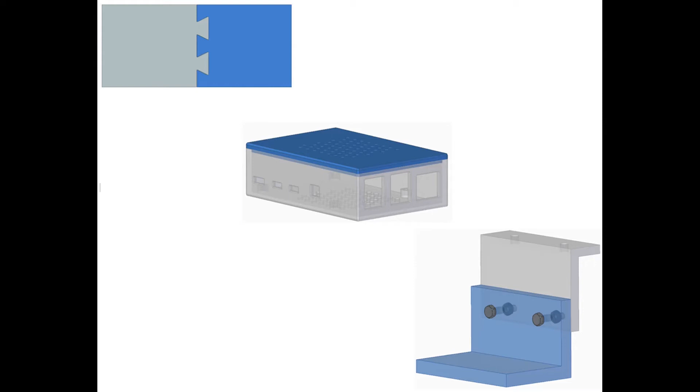In this video, I'll be going over a few examples of how to design parts in Solid Edge that will make it easier to assemble when 3D printing them. This will include a dovetail joint, using Solid Edge's lip function to create covers and lids, and using hexagon cutouts for easy assembly using nuts and bolts.

Here I'm going to show you how to quickly make a lid for this electronics enclosure. I'm going to add a body and name it lid. Then I'm going to create an extrusion using a parallel plane, placing it 2.5 millimeters below that face I selected. That's going to be the part that's inside the enclosure, holding it closed.

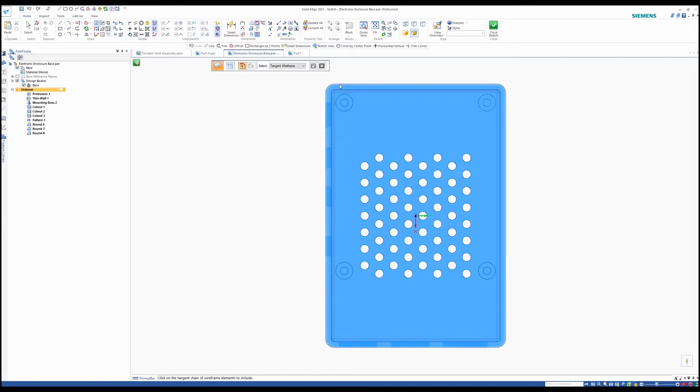Here I'm going to use the project to sketch command and select the inner profile of the base. I'm going to extrude that up by 5.5 millimeters. So you see I have this extra space around the edge there.

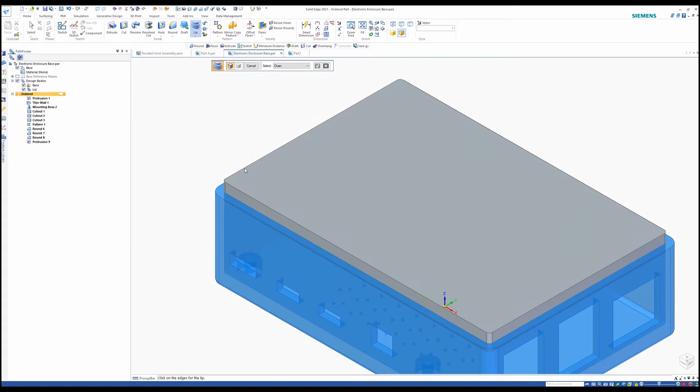So to fill that in, I'm just going to create a lip. You use the lip command, select the edge, and that's the profile I'm going to add around. Width of 3 millimeters, height of 2, and click to finish. And there you go, it's as easy as that. I've now created a lid for my electronics enclosure.

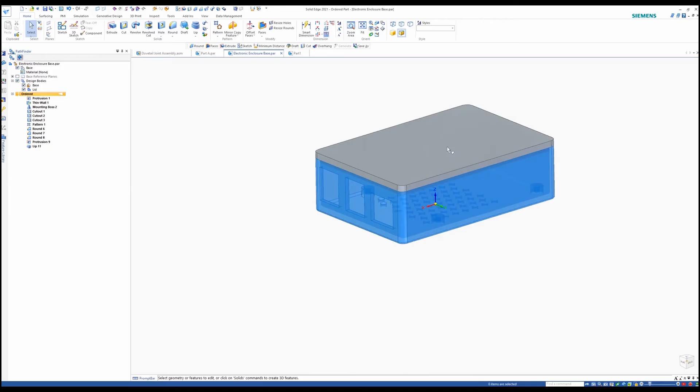In this example, we have a case here, sort of like an enclosure, and we want to create a cover for this that's going to create a full seal and stay closed. So we want to cover something like this, and a quick and easy way to do this when 3D printing is to add a lip.

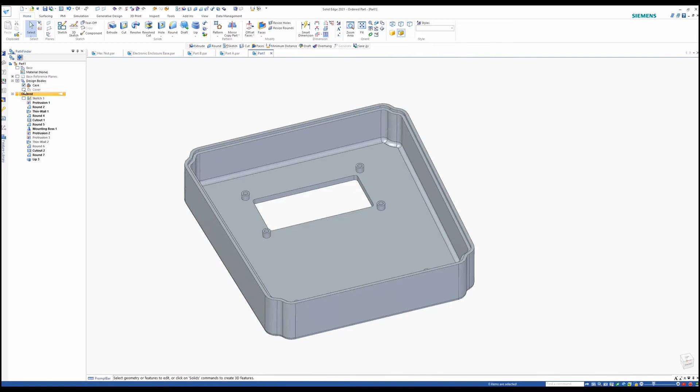In this example, we're going to add a lip along this edge where we're going to add material. I'm going to put the profile above the body, so it's going to add material there. Then we're going to basically do the same thing on the cover, but the opposite - now we're going to remove material. So I'm going to make it my active body, select the edge, and this time the profile is going to be into the body, meaning it's going to remove material.

So now you can see I have a nice snug fit there. It's going to be a press fit. You can put some glue along the inside edge of the lip, and that'll create a nice seal.

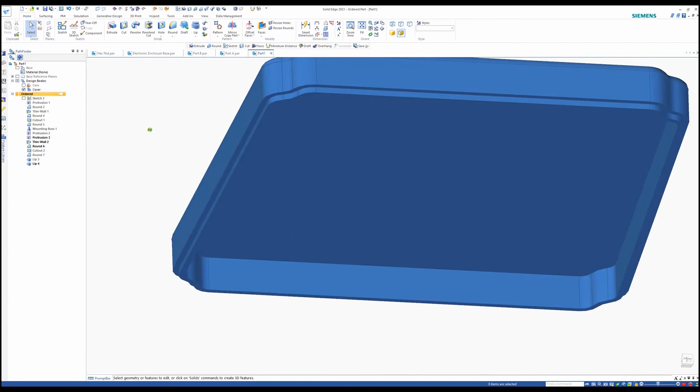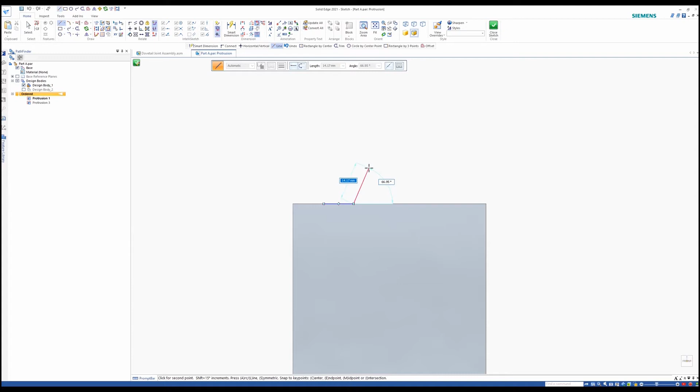Here I'll be showing you guys how to assemble these two parts if we were to 3D print them using a dovetail joint. Starting off with the first part here, I'm going to create the protrusion, and I'm going to be following HP Printer's general guidelines when creating these.

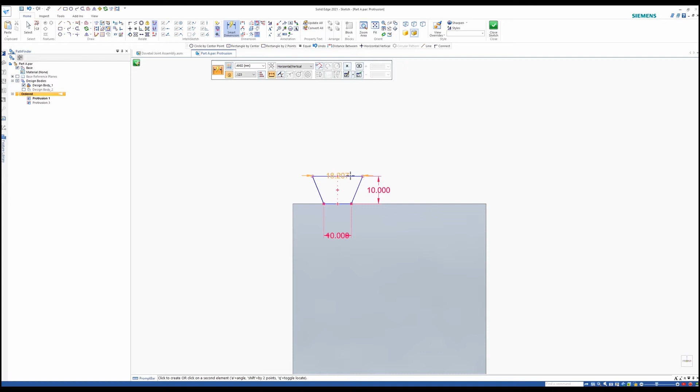It doesn't have to be exact, but they give you some general guidelines just to ensure a nice snug fit. So that's the general shape that we're going to use. I'm going to extrude it to the end of the plate there.

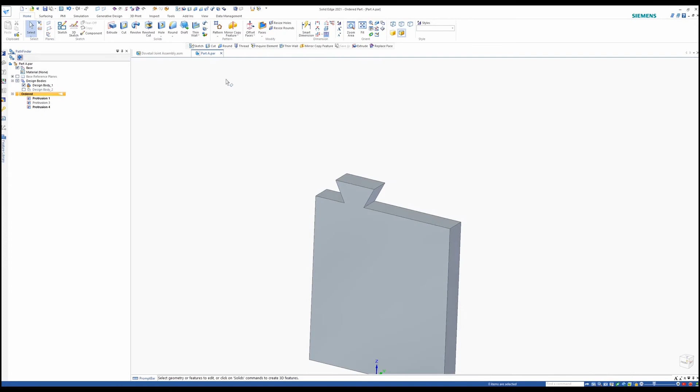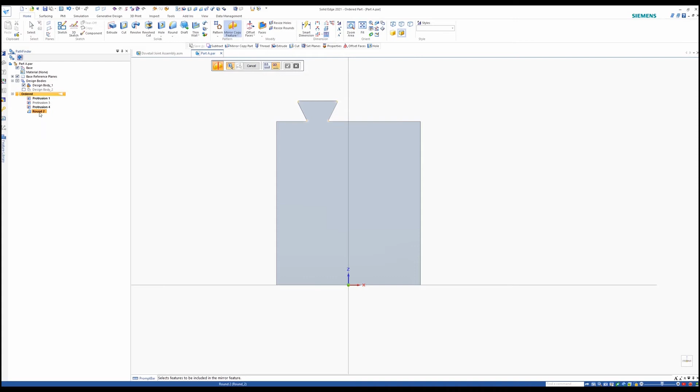Now we're going to add some rounds to each of these corners using a 0.5 millimeter radius. Now this is done, we're going to go ahead and mirror this about the center plane there. Make sure you select the round and the protrusion feature. And that's done.

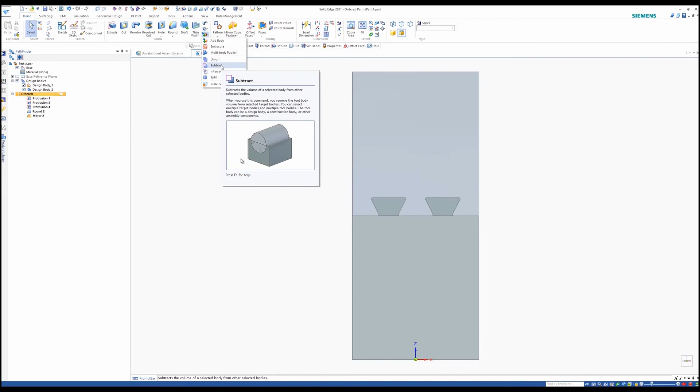So now we'll go and make the design body the active body, and we're going to use the subtract command here, selecting it as our target body and the other design body as the tool body. It's going to subtract the material for us, nice and easy.

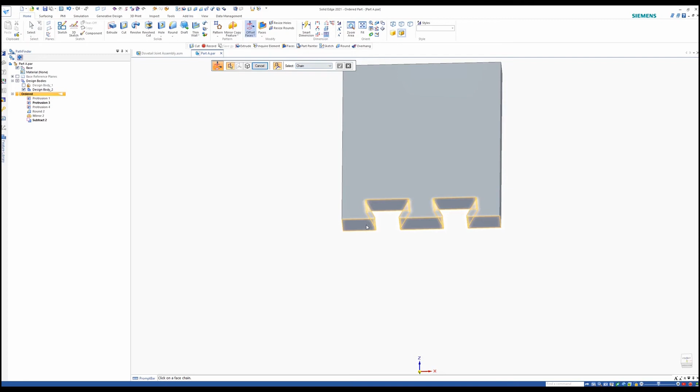Now we just need to offset these faces a bit to give enough clearance so that they fit. We can use the offset faces command. We'll take the entire chain and offset it by 0.2 millimeters.

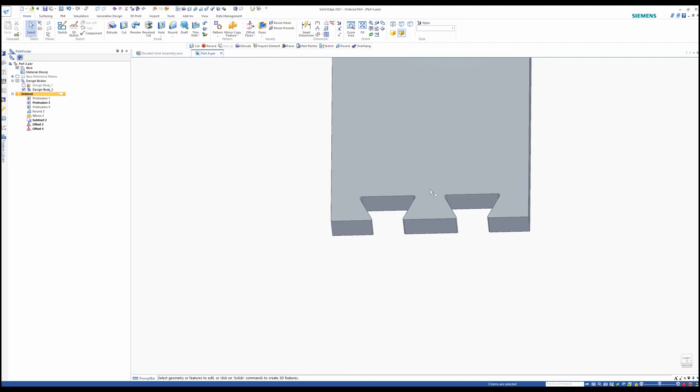Then we're going to change this option to face and select these two faces here, and offset it back down to 0.1 millimeters. This is following HP's guidelines again - these two faces should be offset only by 0.1, where the other should be 0.2. So you see we have the clearance there, and that's how you would create a dovetail joint assembly for 3D printed parts.

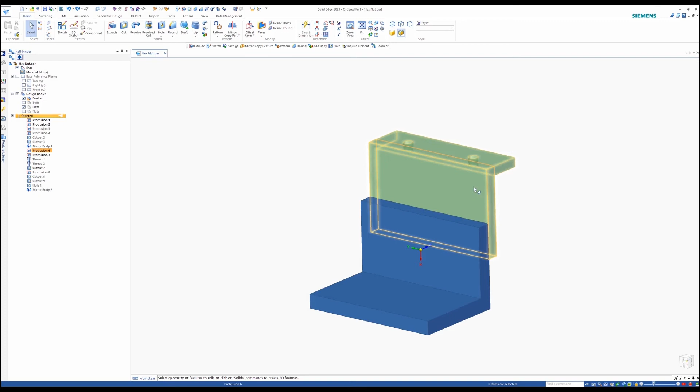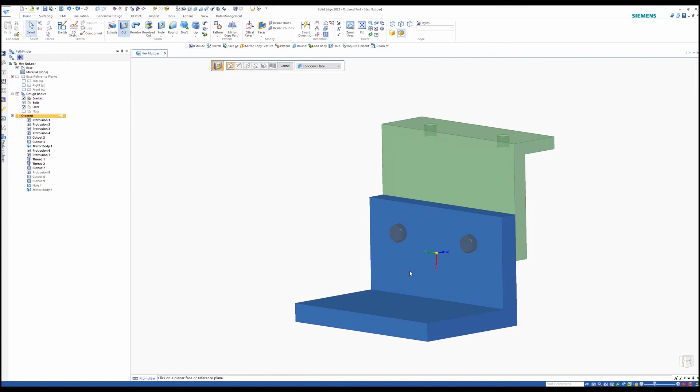Okay, so here we have two parts, and let's say we want to 3D print these two parts separately. For whatever reason we may have a variation of the green part there named the plate - there might be longer or shorter pieces, so we need to find a way to assemble these parts together. Here we have an example using a nut and a bolt, and as you can see, the nut is going to be embedded into the plate. So we're going to have a cutout in the plate to kind of hold that nut secure, and we can just screw in the bolt easily.

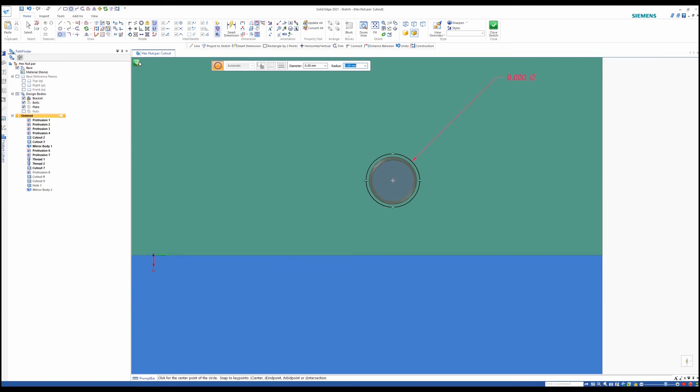So we'll start off by creating some clearance holes here for the bolt. I'm using an M8 bolt, so I'm using cutouts with a diameter of 9 to leave enough clearance for those bolts. As you can see here, I'm leaving just a bit of clearance. I'm going to create those cutouts using the through next option - it's going to go through the part. And you can see the holes have been created there.

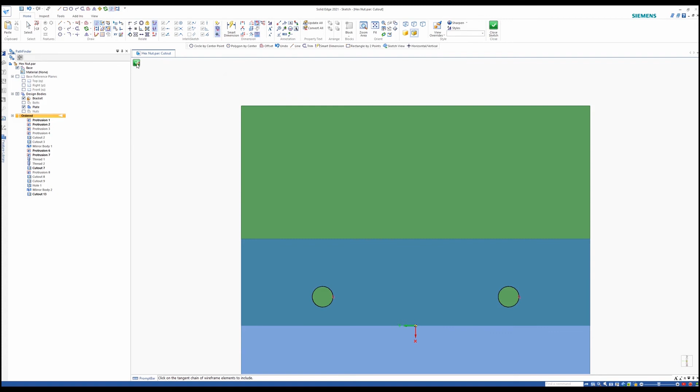So now we'll be doing the same thing for the plate. I'm just going to use the project to sketch, so it'll be linked - if these holes move on the bracket, it's going to follow suit on the plate as well. And again, through next. So now you can see I have my clearance holes for the bolt on both of the parts. And just to verify that I have enough clearance there, that looks good.

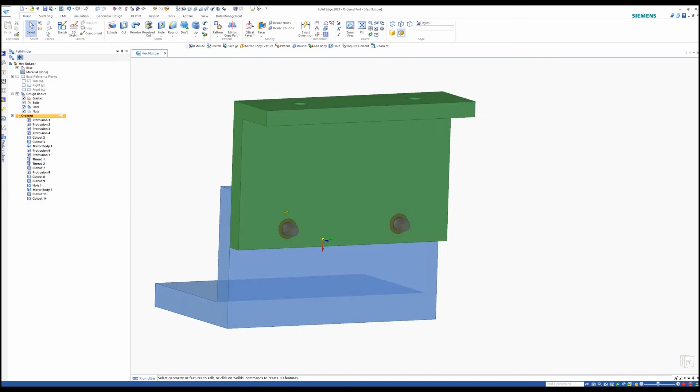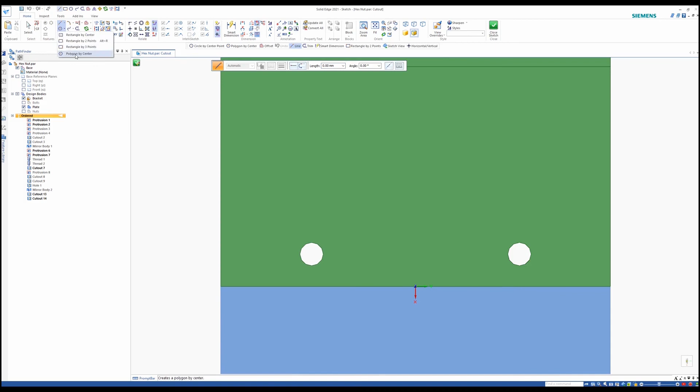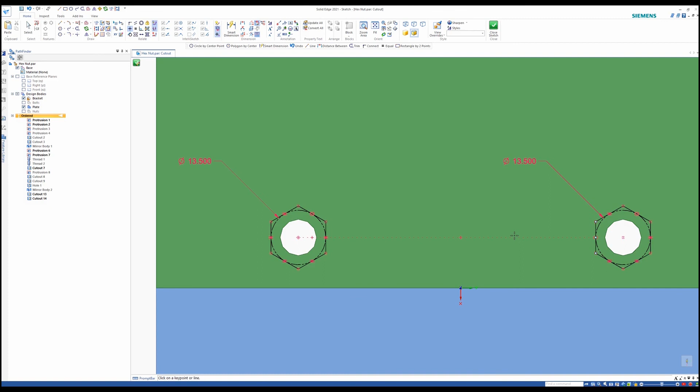Now I want to create the little cutouts for the nuts to be placed inside here. These nuts I'm using are M8, and they use a diameter of 13 millimeters. So when I go ahead and create my hexagon, I want to use a diameter of 13.5 just to leave enough clearance to make sure that nut fits nicely in there. I'm going to enter in 6.75 as the radius, which is going to give me 13.5 millimeters as the diameter. The diameter is what the profile uses to create the hexagon. As you can see there, each midpoint of the lines are connected to the diameter. And then I'm just going to add a constraint to align that midpoint up to the middle so those lines won't rotate. You can see both of the black profiles now, they're both fully constrained.

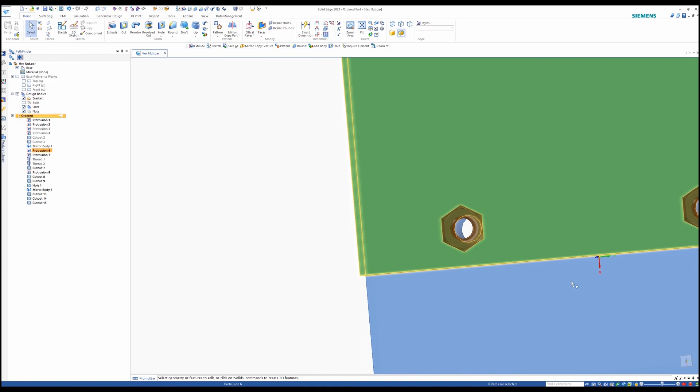And now I'm going to use a depth of 6 millimeters. I believe the nut is 5 millimeters or 5.5, just want to leave a bit of clearance there. And you can see that's what it's going to look like - so the nut is going to sit inside there. Let's make sure I have enough clearance there, which looks good. You don't want to give too much clearance, then it'll wiggle around.

So that's it, there you have it - a quick and easy way to assemble 3D printed parts using a nut and a bolt, using the embedded nut there. It's a bit more convenient than having the nut extruded outside and then having to hold the nut while you're screwing the bolt. So that saves that extra step.

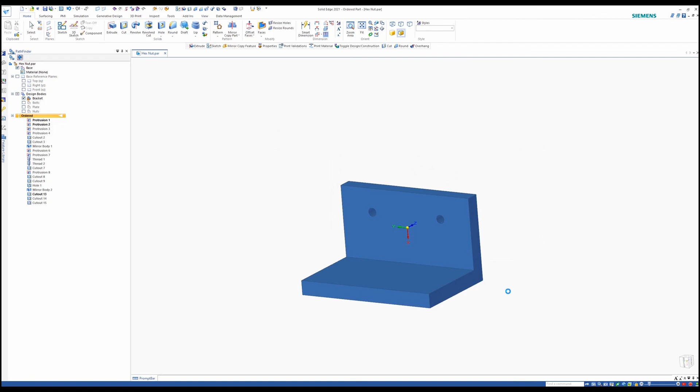And here you can see me saving the STLs one by one, and then I would go ahead and show the plate body and save this one as an STL by itself as well, and then I can send them off for printing.